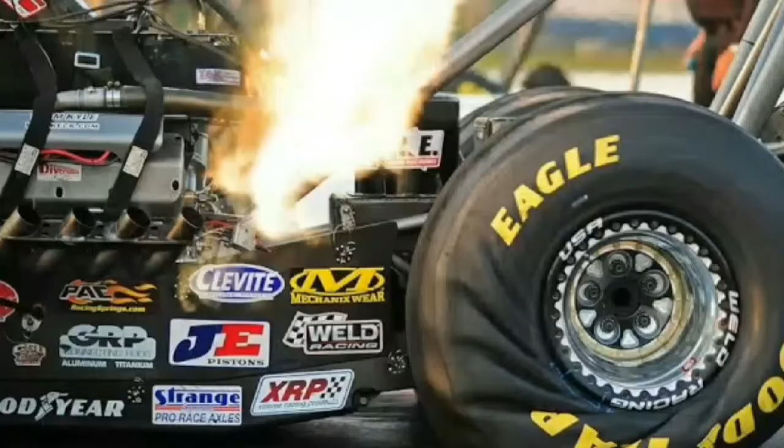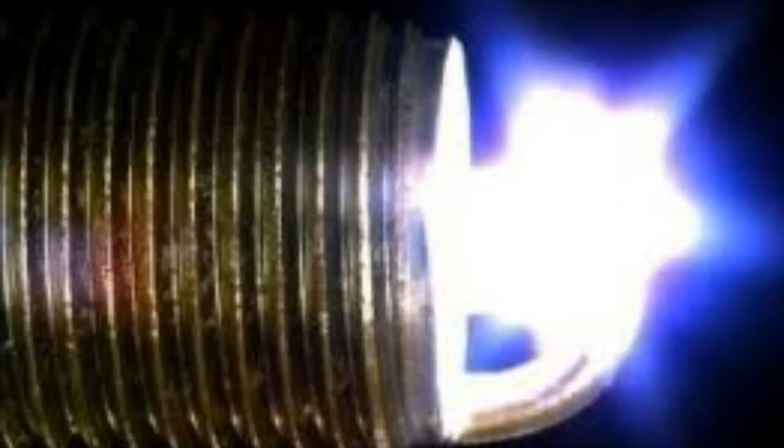The time at which the spark is produced has a great influence on the performance of a spark ignition or normal gasoline engine. If the time of spark is not correct, we won't be able to produce the peak torque and power from a given air fuel mixture.

There will always be a lag between the production of spark and the initiation of combustion. This lag is called ignition lag. So the spark advance is given to the engine according to the ignition delay that is produced in that particular engine.

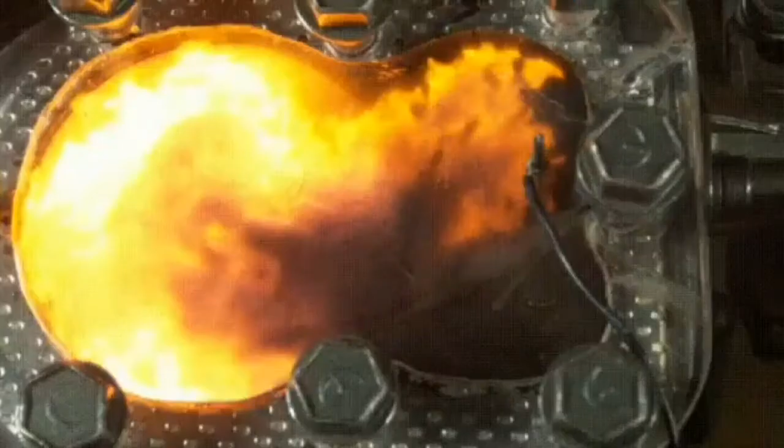Spark advance of a spark ignition engine is defined as the time before top dead center, or TDC, when the spark is initiated. It is usually expressed in number of degrees of crankshaft rotation related to TDC.

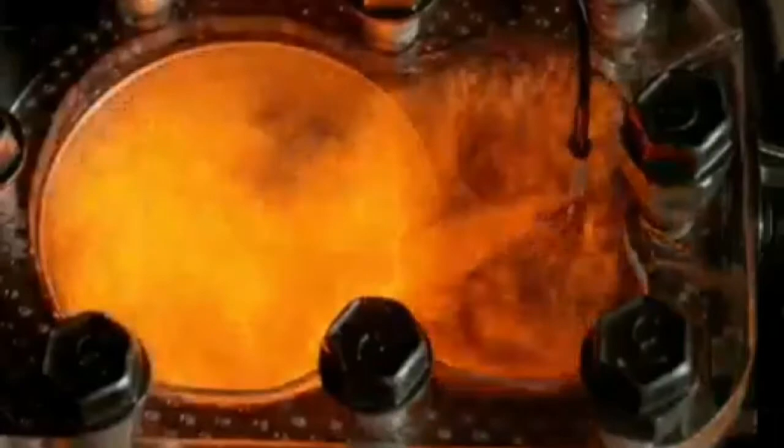If we don't consider the ignition lag of the air fuel mixture, we will lose some power. After producing the spark, combustion will initiate somewhat a degree after TDC, the piston will start to travel from TDC, and the expansion stroke will already be underway, so we won't be able to convert all the pressure energy produced by combustion during expansion, or the duration of expansion will be less. This is why spark advance is very important to produce the maximum torque of an engine.

So to start the combustion process, at the end of the compression stroke we have to produce the spark before the end of that stroke, with respect to the speed and the air fuel mixture used. For example, 4 degrees before TDC spark ignition means the spark is advanced by 4 degrees before the end of the compression stroke, or the beginning of the expansion stroke.

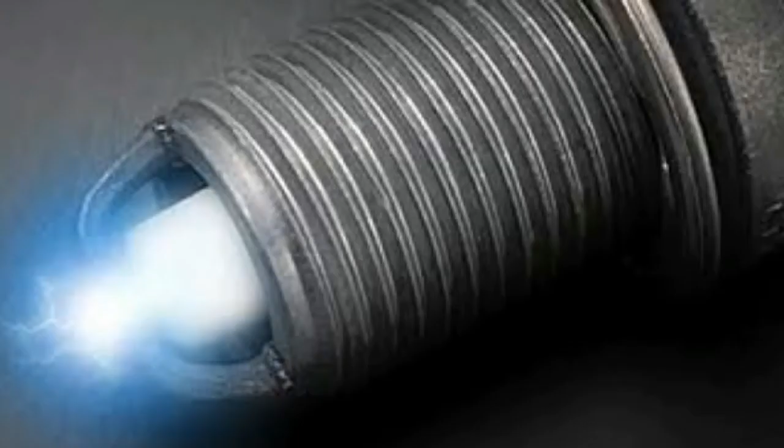The timing of spark production also has an influence on brake specific fuel consumption and the emissions of the engine. So let's look at it.

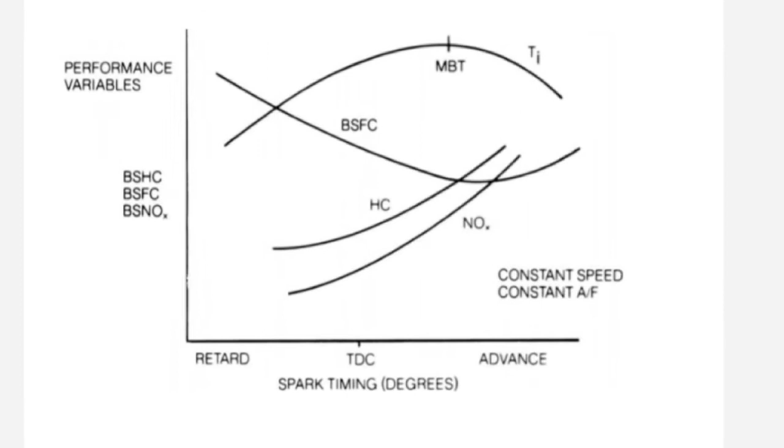The spark timing is only fixed after lots of calibration and engine mapping, so we will get the maximum torque from a particular air fuel mixture.

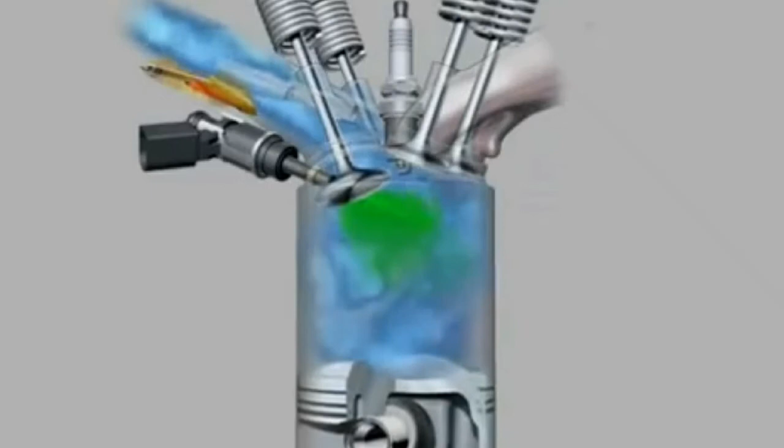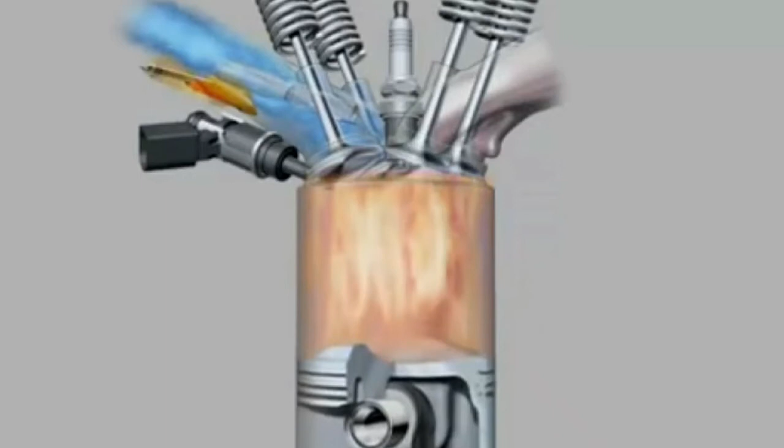The brake specific fuel consumption also increases with spark retardation. This is because we won't be able to convert all the pressure energy produced by combustion, as the duration of the expansion stroke will reduce due to this retardation. So all the fuel will not get burned, and we won't be able to produce the maximum power from the heat produced during combustion.

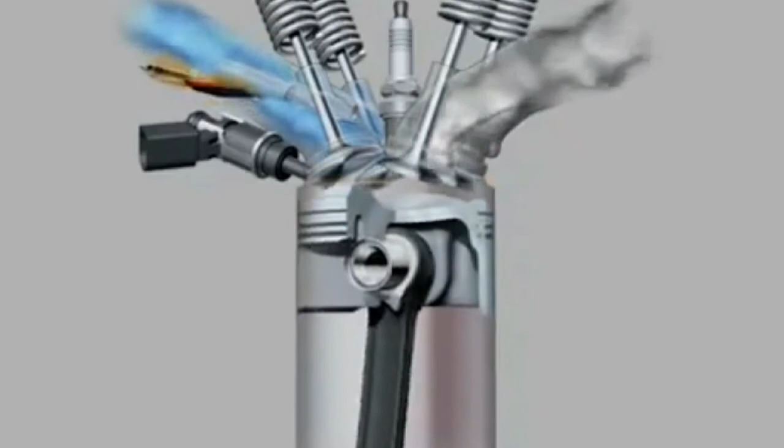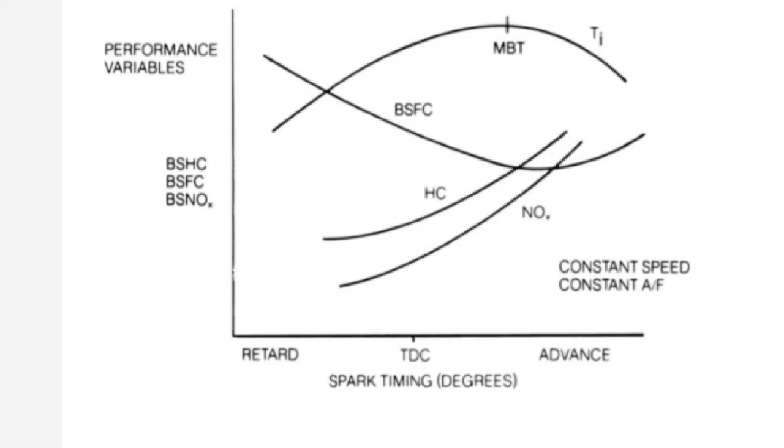NOx emission will also increase with a huge advance of the spark. This is because more time for combustion means higher combustion temperature, which consequently increases the amount of NOx emission. There will also be hydrocarbon emission, because of the lack of time to form a homogeneous mixture between air and fuel, which also leads to hydrocarbon emission.

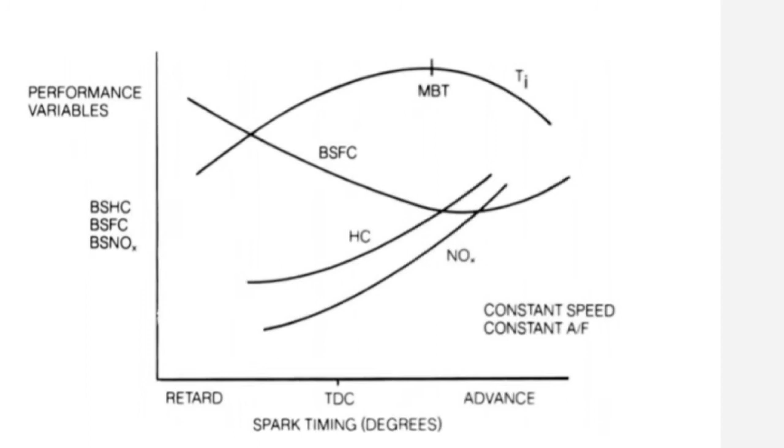So while deciding the spark timing, we have to do a lot of calibration to decide and compromise between maximum torque, power, fuel consumption, and emission.